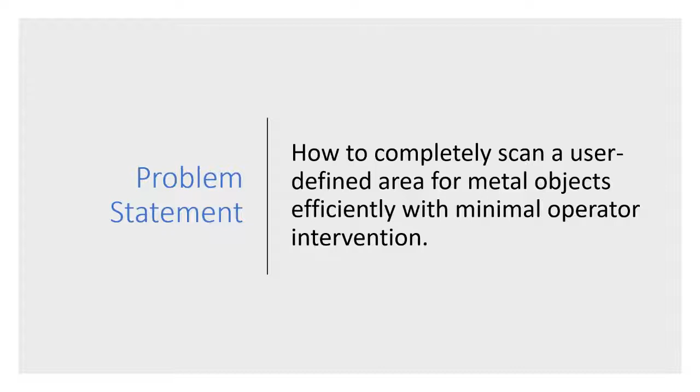The solution consists of a mobile rover capable of autonomous action and a controller by which the operator interfaces with the rover. The rover must be able to detect metal objects and report locations within 12 inches of the object's location. It must cover 100% of the operator-defined area with exception to impassable terrain such as trees, furniture, walls, and other navigation hazards.

The rover must be powered by a battery pack. The vehicle will be fabricated from wood and plastic materials readily available from the local hardware store, as well as project kits such as a tank chassis. The rover is intended for outdoor use in dry conditions. It will not be waterproof and should be able to operate between 32 degrees and 125 degrees Fahrenheit.

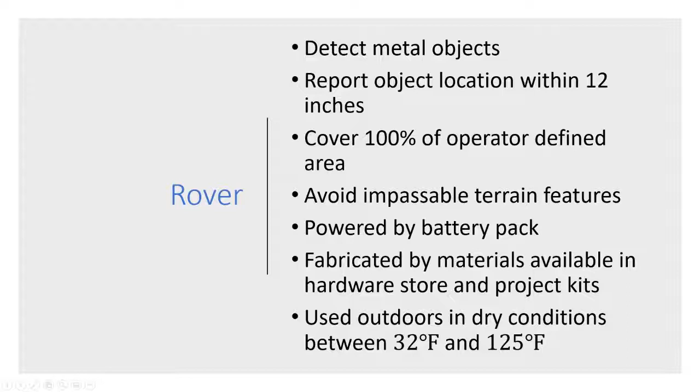The controller will be a laptop computer with Wi-Fi capability. The operation of the system is as follows: turn on the rover, connect the computer to the rover over Wi-Fi, and start the control program.

The operator directs the rover to record a start location, then manually directs the rover to locations along the perimeter of the desired search area, recording waypoints at the turns along the perimeter. After the final waypoint is recorded, the operator instructs the rover to initiate the search. The rover will immediately pursue the first waypoint, recording and reporting the locations of any metal objects detected.

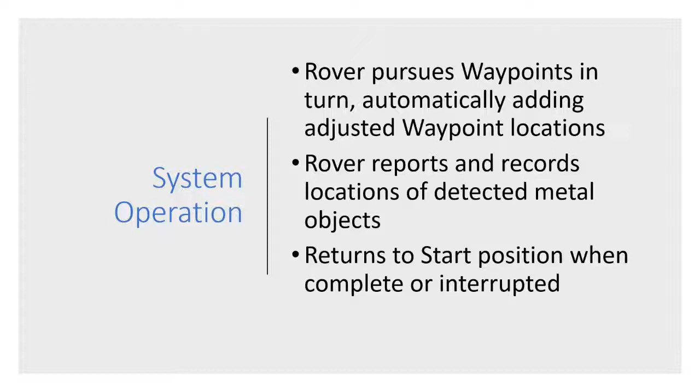At any time during the search, the operator may abort, causing the rover to disregard remaining waypoints and return to the start position. When the search is complete, the rover will return to start position and await further instructions. The rover can then be directed to pursue locations of detected metal objects. Once the detected object is resolved, perhaps by collecting or ignoring, the item is dismissed from the list.

After all items on the detected object list have been dismissed, the rover is powered down, control program stopped, and operation of the autonomous metal detector system is complete.

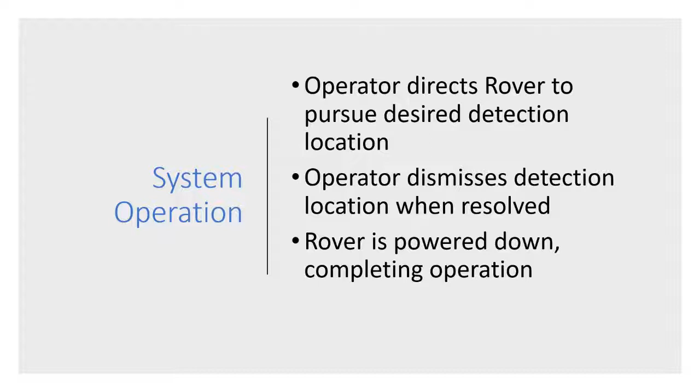Agency approvals required are Federal Communication Commission for wireless communications and Underwriters Laboratories for battery charging equipment. These will be obtained through use of pre-certified equipment. The project cost estimate for research, development, and assembly is $1,000 with a manufacturing cost of $100. This concludes the problem statement.

Hi, this is Derek Bellinger. Our main deliverable is the autonomous metal detector, which is in the form of a rover, and it's part of a system that consists of a rover interface, the rover itself, and a laptop computer for the operator to control the rover.

Our list of deliverables for the rover is the wiring schematic, which will show the setup of all components and how they're wired together to the Rio, controlled by the program we're creating in LabVIEW, operated by the user. There's also an operating guide we will be developing for the rover, so any operator can come in and do their own search for metal objects and set their own waypoints, and it'll include troubleshooting and risks involved.

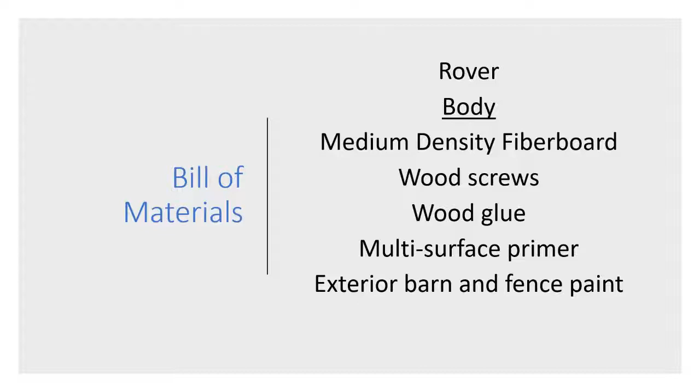The following items are anticipated for the different components of this project. For the rover, the body will be constructed of medium density fiberboard assembled using wood screws and wood glue, and painted with a multi-surface primer and exterior barn and fence paint.

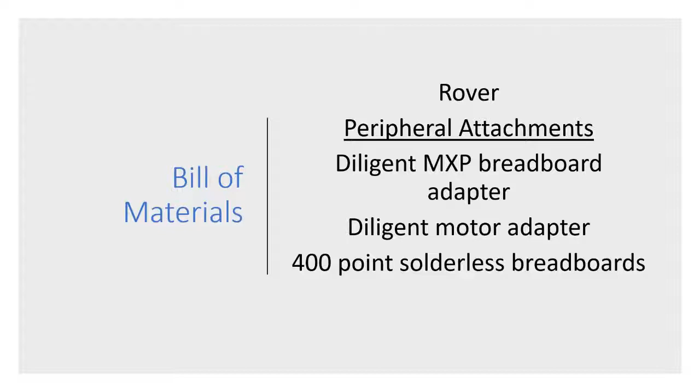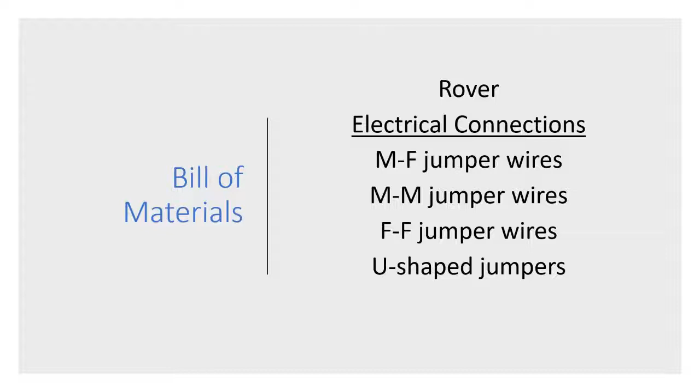The onboard computer will be the National Instruments MyRio. Peripheral attachments to the MyRio will be the Diligent MXP breadboard adapter, Diligent motor adapter, and 400-point solderless breadboards. Electrical connections will be made between components using male-female, male-male, female-female, and U-shaped jumper wires.

The propulsion system will consist of two DC motor gearboxes from the mechatronics kit and a tank tread track system. Several different sensors will be used. Location sensors will be constructed from PMOD gyro, PMOD compass 2, and PMOD GPS. Navigation sensors will include PMOD max sonar, IR range sensor, and push buttons. The metal detector will be constructed using on-hand resistors, capacitors, rectifiers, MOSFETs, bulk wire, and Hall effect latches.

The rover's power plant will consist of one 12-volt nickel metal hydride battery pack. Backup power will be a spare battery and a universal battery charger. This completes the materials list for the rover.

The controller will be a Windows 10 laptop PC with LabVIEW 2019 MyRio real-time software. The total cost projection, including items on hand, is $989.01. Current out-of-pocket expenses is expected to be $155.51. This concludes the bill of materials.

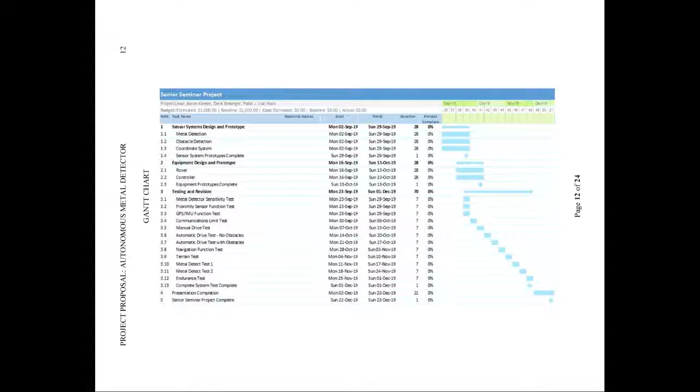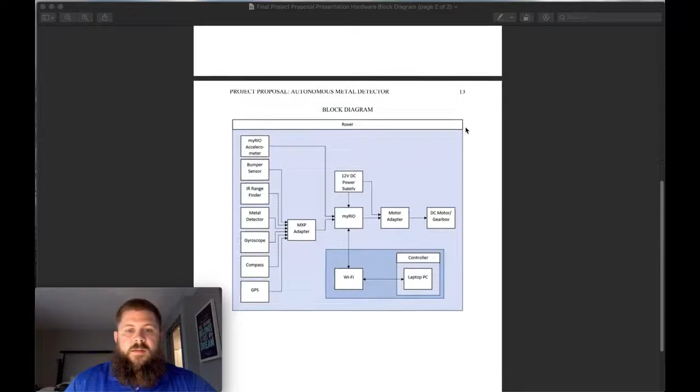Let's jump into it. Here you can see our block diagram. There are 7 feedback devices that will be reporting through the MXP to the MyRio, which will be powered by the 12 volt DC power supply, which will also power the motor adapter and DC motor gearbox. The MyRio will be operating through Wi-Fi via the laptop PC, where the operator will provide all the inputs and controls for the whole process.

Starting with the MyRio accelerometer, it's going to measure acceleration in 3 linear axes. The bumper sensor will detect when we bump into something. The IR rangefinder will hopefully tell us the range between our rover and any objects. The metal detector will detect metal. The gyroscope will report radial acceleration and how fast we're changing speed through turning.

The compass is just a magnetometer. And the GPS will be recording the location when metal is detected, helping us to plot where our rover is going.

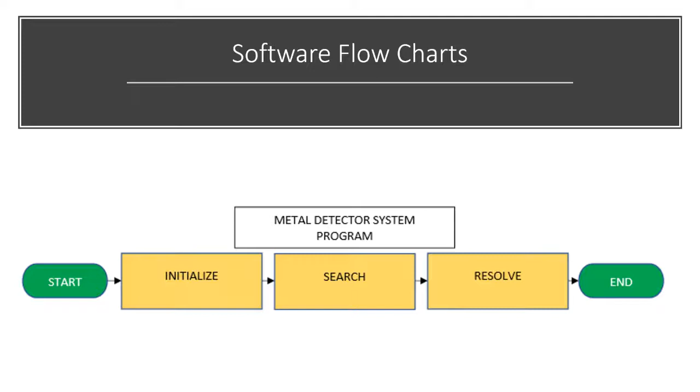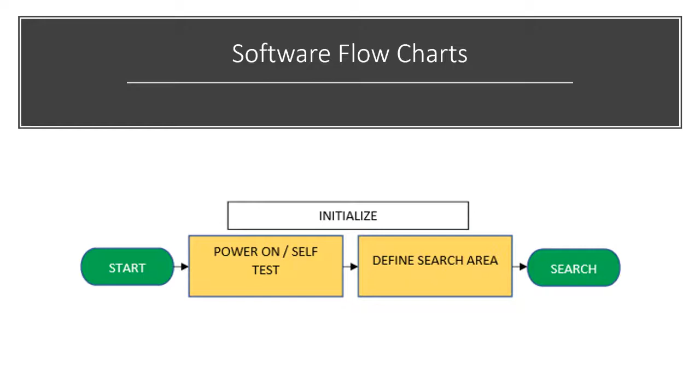The program for the autonomous metal detector is performed in 3 stages: initialize, search, and resolve. The initialize stage performs the power-on self-test to detect any errors and calibrate sensors such as the metal detector. After startup is complete, the operator provides the search area definition.

The search phase is performed autonomously by the rover, using the perimeter of the search area as the initial navigation waypoints and updating the list of waypoints until the search area has been traversed. During the search phase, the rover scans for metal objects and records the location of any detection event.

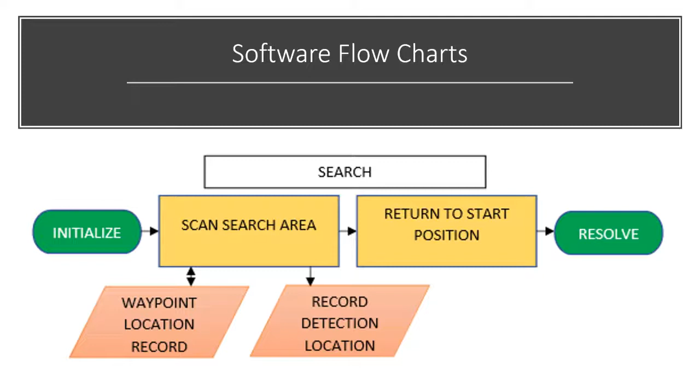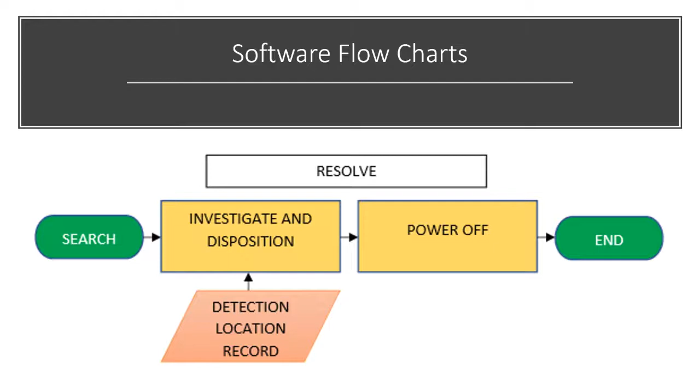When the search is complete, the rover returns to start position. The resolve phase is performed with the operator. The rover may assist the operator in returning to the detection sites to resolve objects found. After all detections are resolved, the rover powers off.

During the initialize and resolve phases, the rover is under the operator's control. During the search phase, the rover operates autonomously. This concludes the description of the software flowcharts.

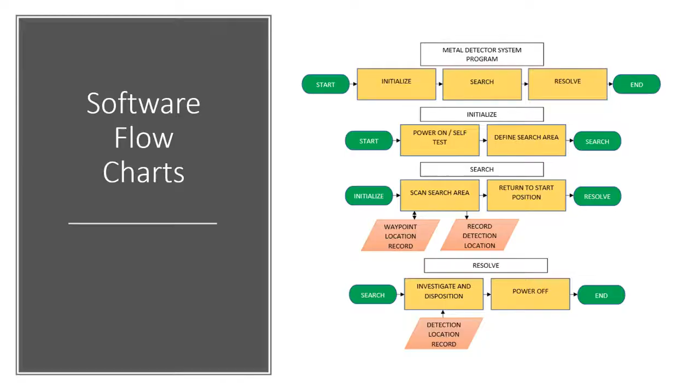The first test we will be conducting is the metal detector sensitivity test, and this test will determine the most efficient voltage range for the metal detector.

Test number 2 will be the proximity sensor function test, and this is to help us determine the placement criteria for the proximity sensor on the actual device.

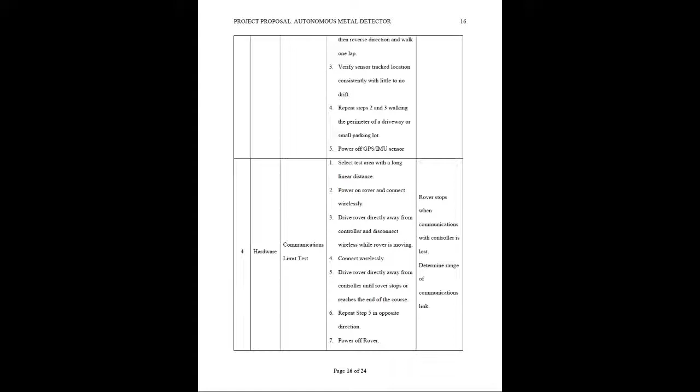We'll also be doing the communications test. This will help us determine the distance at which the rover will lose communications with the controller from a wireless standpoint.

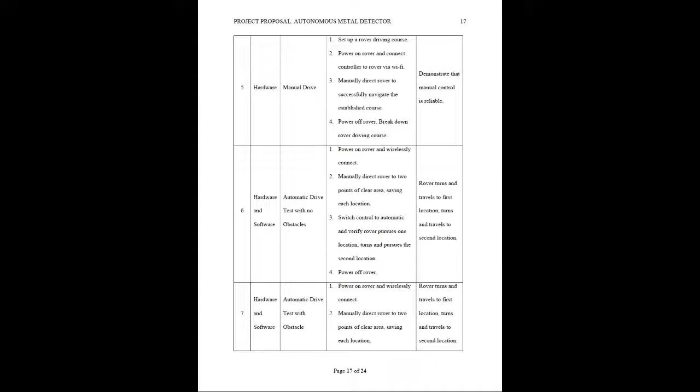A little further down, we have the automatic drive test. We're going to do this test twice, without and with obstacles, to help us determine if the device functions as designed, and that is to avoid obstacles.

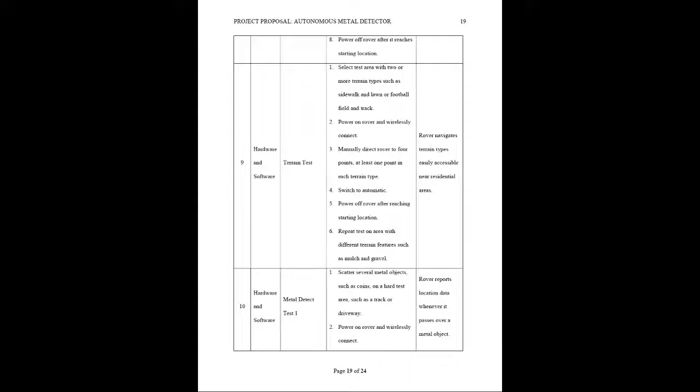Further down, we have the terrain test. We'll be testing this device on mostly smooth terrain, such as a sidewalk, freshly cut lawn, football field, and a track. We just want to make sure it navigates easily accessible areas, near residential areas, things of that nature.

We'll also be conducting 2 metal detector tests. Each one will be on the different types of terrain we discussed earlier, the first on a track or driveway, a hard packed surface, and the next on a lawn or football field. We just want the rover to detect and then report back to the actual controller.

The last test, test number 12, will be the endurance test, and this is to determine maximum search time on the battery, pretty much just a battery life test. We want to make sure we're not just putting out a 3-minute metal detecting rover.

Hello everyone, this is Aaron Keeter again, and I will be presenting the alternate approaches section of our final project presentation. The first alternate approach has to do with the MyRio failure.

If this occurs, our alternate approach would be to use the Arduino or Raspberry Pi to control the system.

The second alternate approach has to do with the MyRio being realized as not sufficient to control all the devices we're attaching, the sensors, the metal detection system, the GPS system, and whatnot. We might ask the assistance of the Arduino or the Raspberry Pi, and if those don't work, we might replace the MyRio controller entirely with another version.

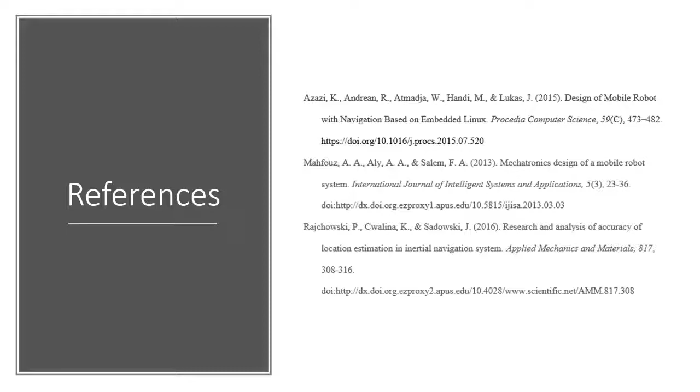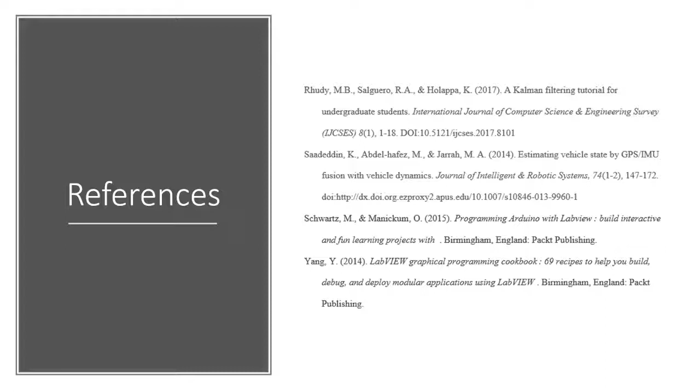Programming Arduino with LabVIEW, Build Interactive and Fun Learning Projects, by Schwartz and Manickum, and LabVIEW Graphical Programming Cookbook, 69 Recipes to Help You Build, Debug, and Deploy Modular Applications Using LabVIEW, by Yang. This concludes the list of references.